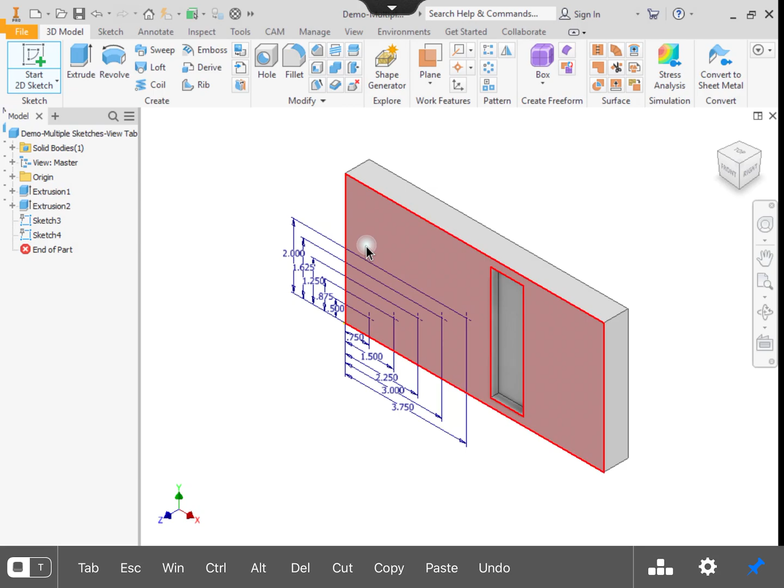The reason this is a problem is because when you come up to the top to get a dimension and create on this, you can see that none of my geometry underneath that sketch is highlighting. It can be frustrating.

But take a look at the model browser bar on the left-hand side of the screen, you can see I have multiple sketches. These are called unconsumed sketches. You should only have one sketch unconsumed, and here I have 3 listed, so we need to get rid of 2 of those and edit the one our geometry is on.

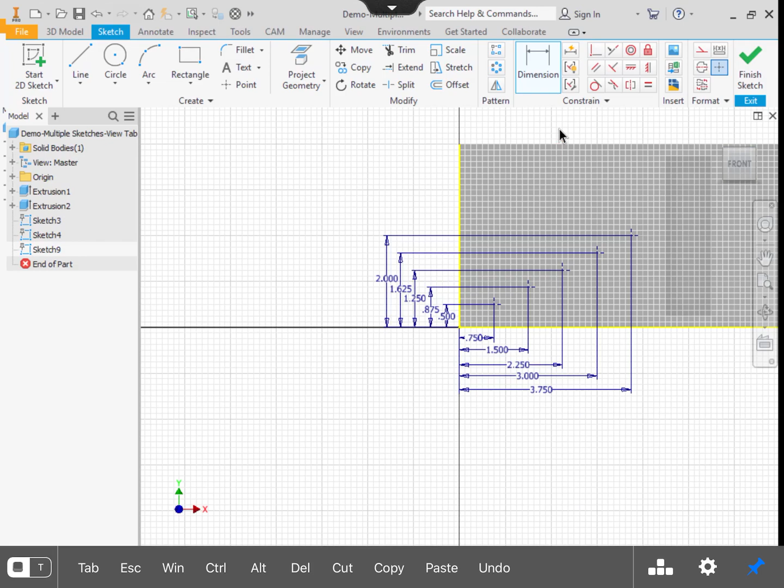So in order to do that, we're going to finish the sketch. Then I'll take my pull-down shade, get my mouse, come over to my model browser bar. I'm going to click on Sketch 9, and nothing highlights, so I'll right click and delete this. Then I go to my next sketch, Sketch 4, click on that, nothing's on that sketch either, so I right click and delete it.

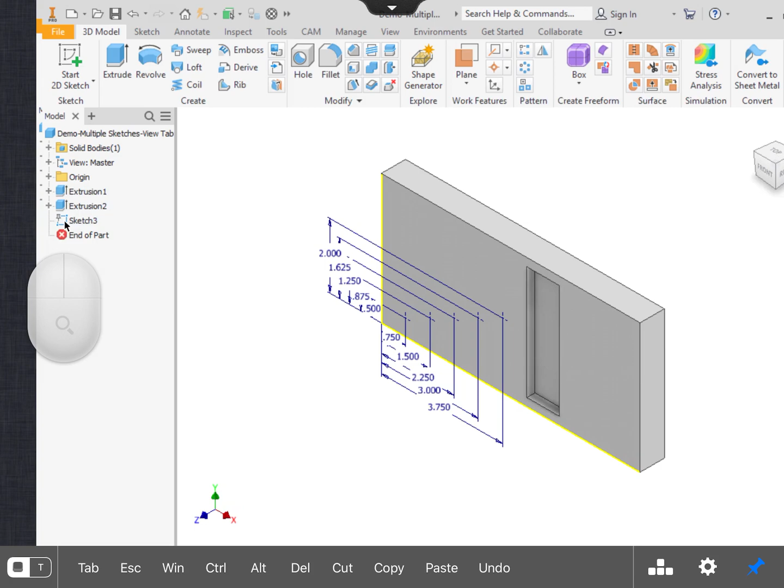When I go to Sketch 3 and put my cursor on top of it and click, do you see how everything highlights on my model? That's the one I want to right click on and edit this sketch.

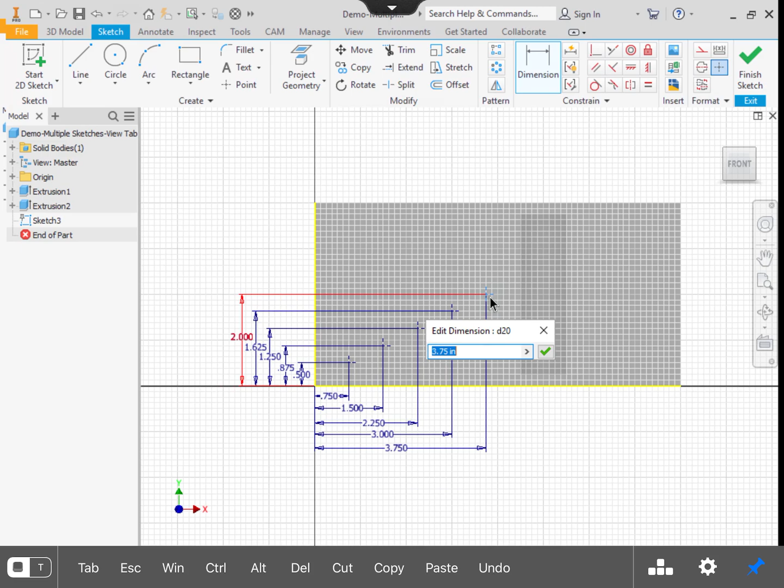Once I edit that sketch, I'll put away my mouse and get my pointer tool back out. Now I can come up to the top, get my dimension tool, come down here and grab a point for my geometry, and things will edit for me.

I can also take a rectangular pattern, select my geometry, that first point we created, pick my direction, flip the arrow that's on there, enter in my quantity, bring up my keyboard. I like working with the number pad instead of swiping down on a letter. I'll delete that 2 and put 5 in there, come down to my spacing and enter 0.75, and click OK.

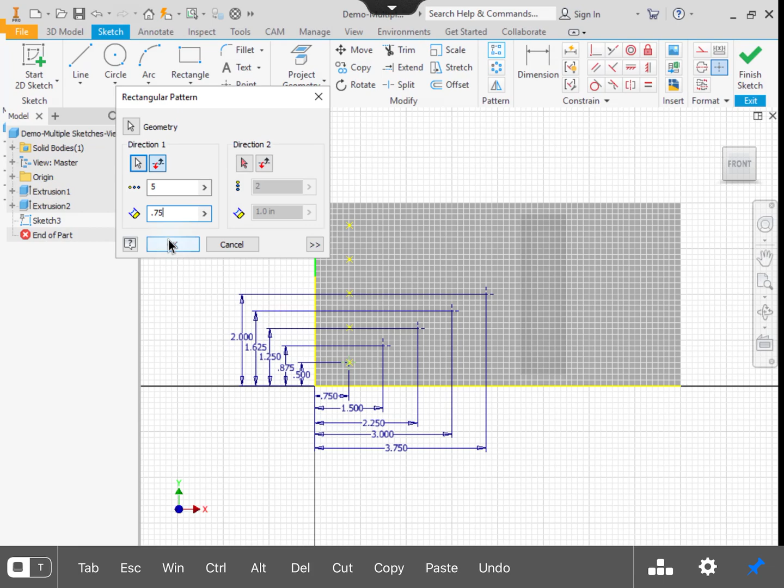And you can see how that works, I created some more geometry on there. You've got to remember to go back and edit a sketch. Don't keep putting sketch on top of sketch.

Another problem students have encountered is when they open up a drawing, their model browser on the left-hand side is gone, or the navigation bar on the right-hand side is gone. Usually that happens because by accident or on purpose it gets closed out or X'd out, same thing with the navigation bar.

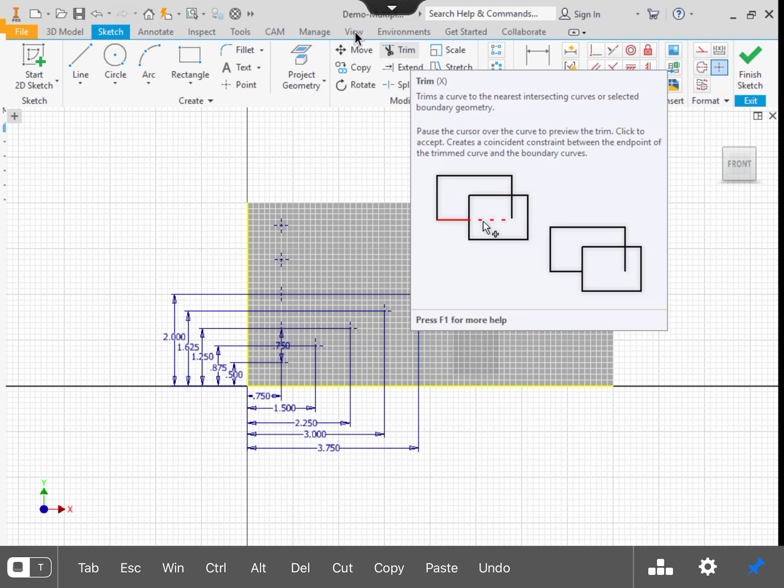A way to bring those back, it's not a big deal. We just go above the ribbon bar to the View tab and select that. Once selected, go to User Interface, check the box for the navigation bar, and that brings it back up on the right-hand side. I'll check the box for the model browser, and that brings it back up on the left-hand side.

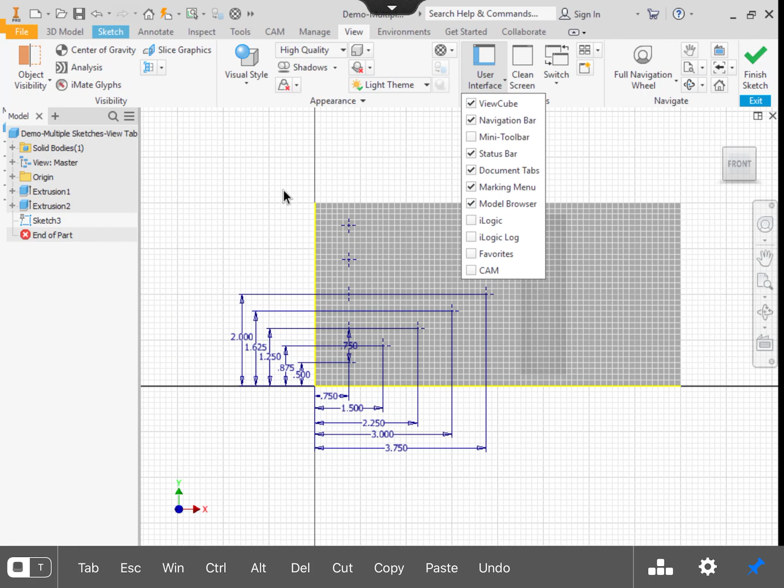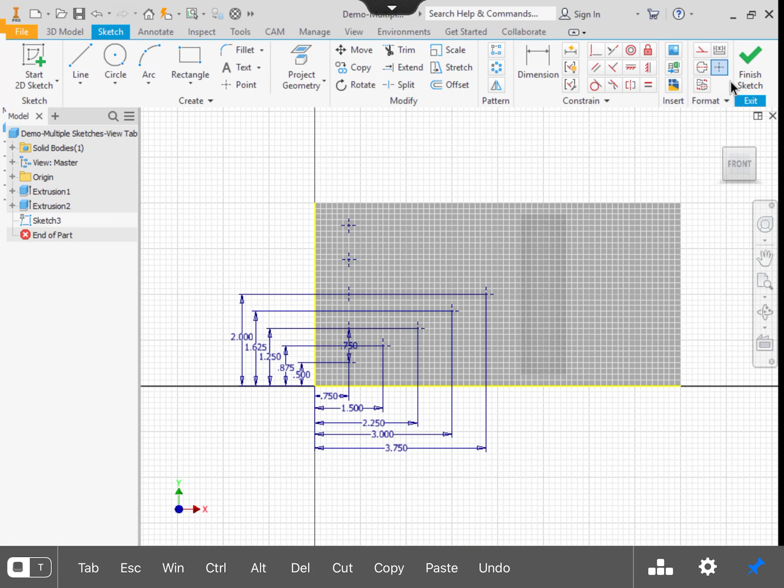The only thing to remember is after you bring that back up, your ribbon bar looks different, so you'll either have to go back to the Sketch tab. Do you see how I have that highlighted blue? In order to get your ribbon bar back to the way it looks, or change the model browser bar to the correct ribbon you want. Here I'm still in my sketch, so I'll finish that sketch.

The last problem some students have run into is that when they're in the CAM area of Inventor setting up a part, I've talked about these tabs up here - if you cannot view them, take your mouse, come over to the side, click on that, and expand this out in order to view all the tabs going across there.

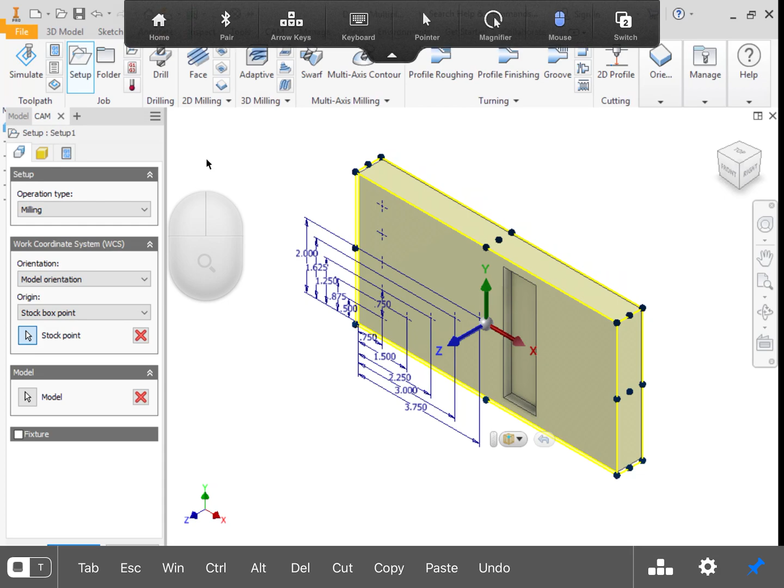And I think what's happening is sometimes students are undocking this model browser - what I mean is you're clicking on this top part and pulling it out of where it belongs.

Now mine showed up and it looks kind of small, and I can still see the OK and cancel down at the bottom. However, some of them are expanding really large and you're losing the OK or cancel at the bottom of the menu. What we need to do to fix this problem is redock this model browser.

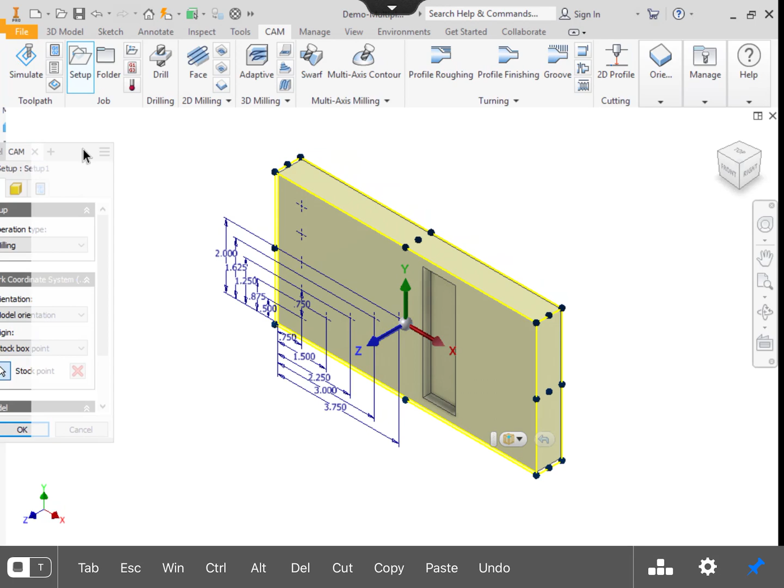So we come up here between the plus and these pancakes that are up here, click, hold down, and drag this over to the left-hand side of the screen. When you get that highlight blue on the left-hand side, let go of it, and it's going to redock itself on the left-hand side. That's where we want it.

Problem is, I still can't see my OK and cancel down at the bottom, and that's because I like working with this keyboard that's pinned down here at the bottom. In order to work on this over on the right-hand side, I need to unpin it, that blue pin, and now I can fully access that OK and cancel button at the bottom. However, after I'm done, I like working with that, so I'll bring my keyboard back up and repin it when I'm done using it.

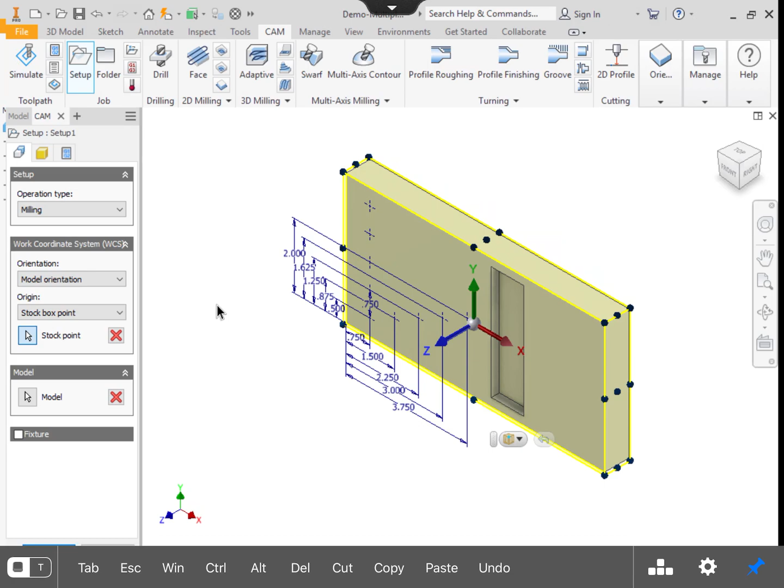Keep these in mind as you're going through working on Inventor. Hopefully this helps out with some of those problems. And as always, let me know if you run into anything else I can help with. Have a great day.